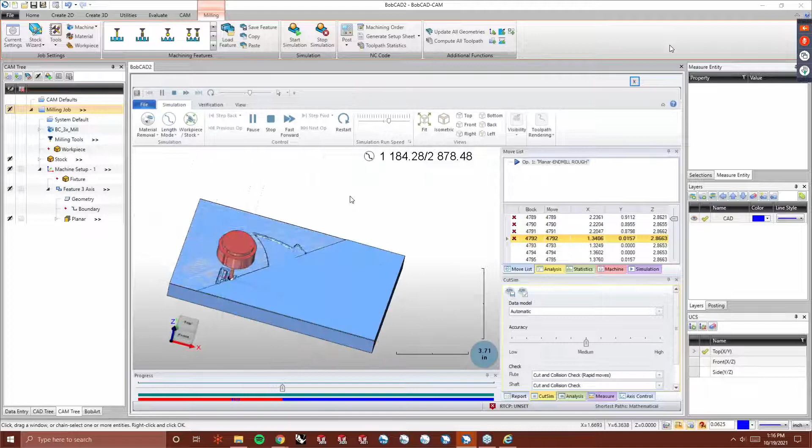Now I just have this kind of cranked up, so we'll see it pretty quick. Now if I have to, I can always have that tool go the opposite direction as well. Looks like it came out all right.

I might want it to go the other way, or even just have it go across X and then across Y. You can have it do more than one planar. There's a lot of different ways you can go in and apply these.

Now, for those of you guys that might have the 3-axis Pro, you can do a little bit more with these toolpaths. Let's insert a 3-axis. We'll just do another one real fast.

And this time, let's do, say, maybe an advanced rough to rough everything out, even though it's only taken a little bit. And then let's do an advanced Z-level finish on top of that. So that'll just really do walls.

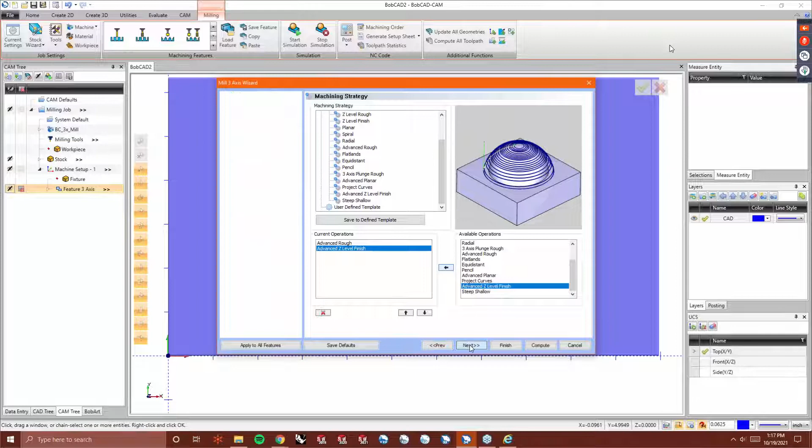So for the roughing, we'll just use the same tool. Depth of cut, let's just do the full 1/8. And we'll actually modify that by telling it to do machine flatlands. It'll machine everything flat with this tool, which we can even change the tooling to a flat end mill.

Step over, yeah, 100 thousandths should be fine. And maybe reduce it a little bit. Let's say 75 thousandths.

And I'm going to leave an allowance, but only on the side. I'm not going to leave any allowance on the bottom. And what that's going to do is allow me to go into finish with the machine flatlands. I can finish that floor, and then the Z-level should do the walls.

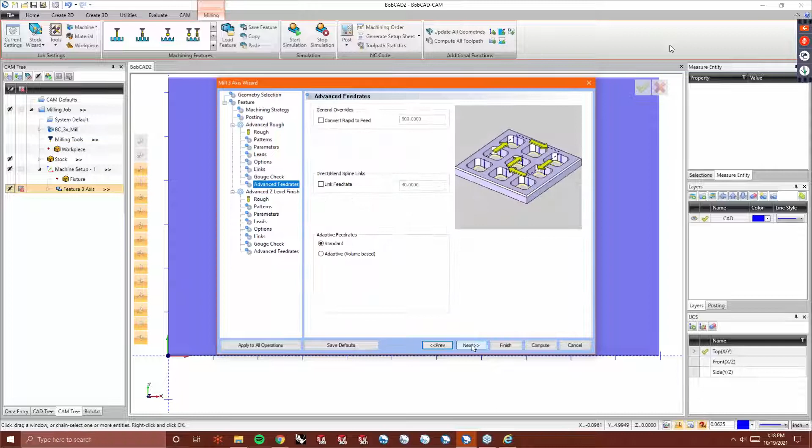And I'm using that 3/16 ball. That should all be fine. Depth of cut, let's make it 25 again.

We want to do a machine flatlands to add an additional pass for the floor. Don't really need anything else there. Not too worried about lead in. Not really worried about the options or the linking. So we'll just go ahead and compute.

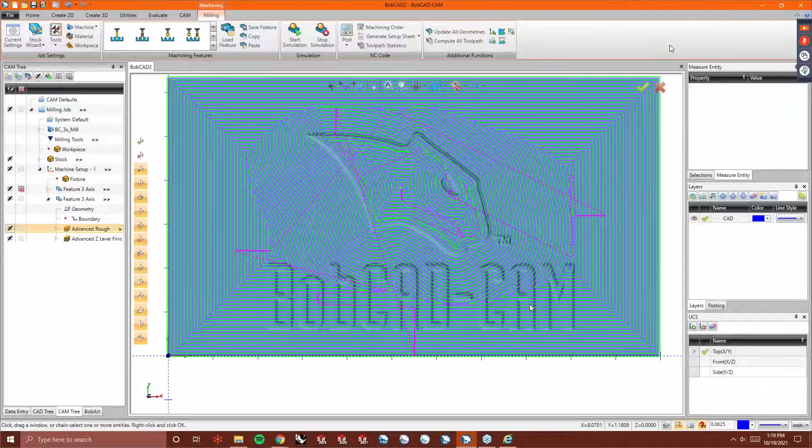So this is doing it a little bit differently, and it actually did a pretty decent job. So it's roughing out everything, and then it's going down and just doing the walls.

So let's simulate that. If you have 3-axis Express or even 3-axis standard, you can do similar things. You just don't have as much control.

Now I really don't even need to do all the flats. I can tell it to only do the CAD. But that just allows it so that tool can just follow those walls, which that did just about as good.

I might need to leave more of an allowance so that I'm not... yeah, that's probably what killed me. The 15 thousandths allowance didn't really leave much for the radius, so some of this is pretty ugly. I may even want to use a smaller radius tool.

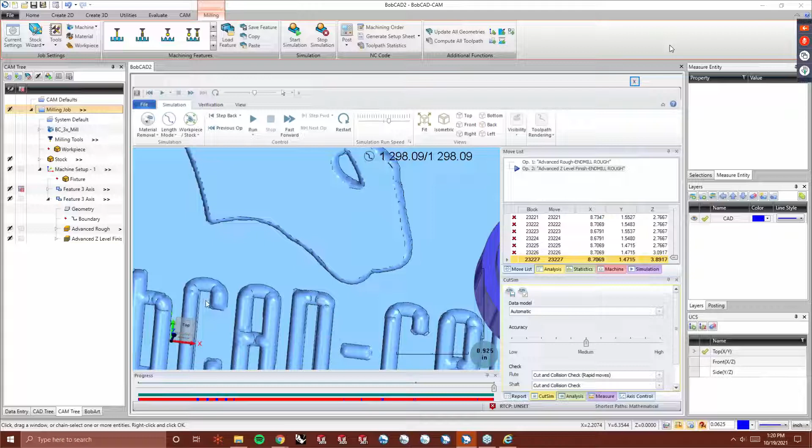But really, it's all 3-axis toolpaths that you can use. You can't use anything 2-axis. And really, if you want to contain the toolpath within, say, just the cat, maybe I only want the roughing in there. Well, you can hit the E key on the keyboard to hide the emboss.

And I can still use that same image. I can load that image in. Because I didn't change the size of it, I can actually use the vectorization to create a boundary. So I just find a decent spot.

And then for my roughing, if I hit the I key to hide the image, I can pick just the cat or the boundary for the rough. And when I compute it, it's only going to be inside of there. So you do have some flexibility of how it goes through to finish on this.

Let's just reduce that tool down a little bit, change the radius of the tool.

Yeah, it looks like it's trying to do a little bit on the outside, so I might want a boundary for that as well, which I could use the same vectorized image for the boundary.

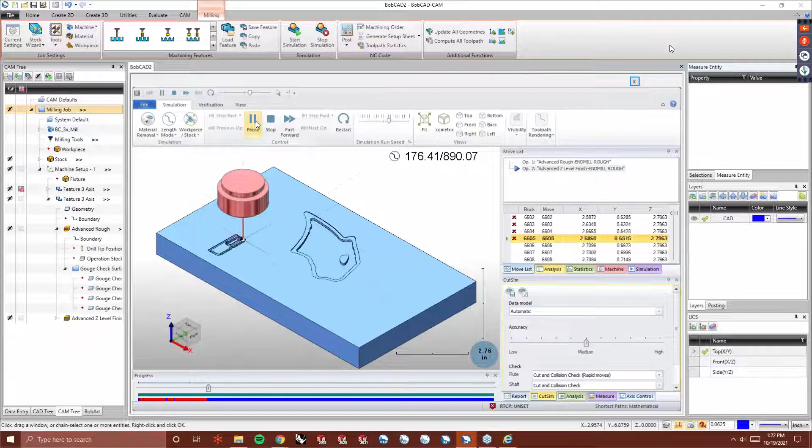Now, there was a lot of extra material because of the tool size change. So I'd probably want to do maybe an equidistant or something so that I can get the bottom, the wall, the floors and everything done in there, and then use a boundary to contain it inside of those. But you kind of get the idea.

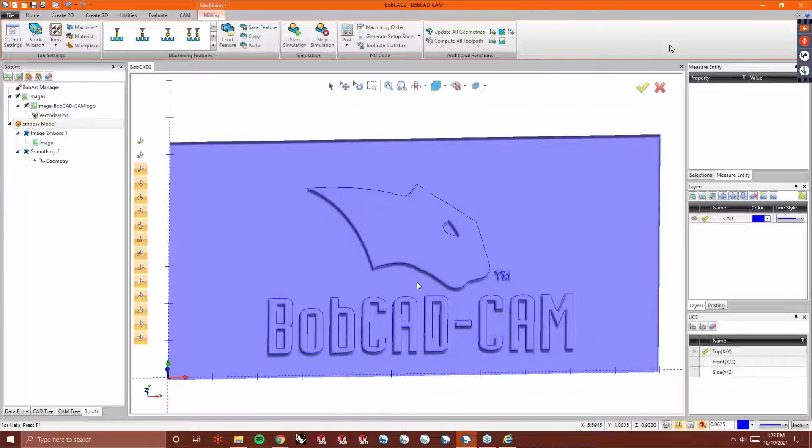Now, there also is, before I move on, when you're doing the emboss, I did an add. If I need to invert this, I can tell it subtract. And it will just be the opposite, where the lettering will be standing up and the white will be in the background.

So when you're looking at an emboss, it's taking the contrast between the colors to generate it. So what you're really wanting to do when you're looking at an image is to find a high contrast image. So let's take a look at some image types real quick.

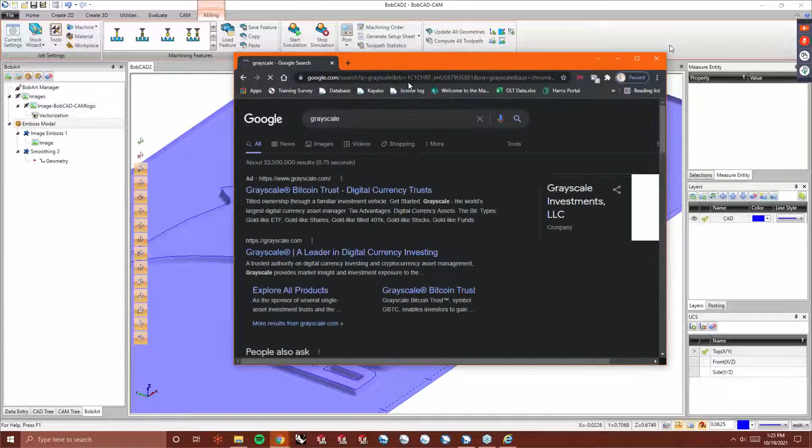So what I mean by that is you need to have a height map. When you add a height map to it, you're actually getting images that are specifically made to give depth.

I'm getting some other ones set up here. So there's three main image types that create depth: grayscale height maps - let's see if we can find something in here that might come out well. That's actually pretty decent.

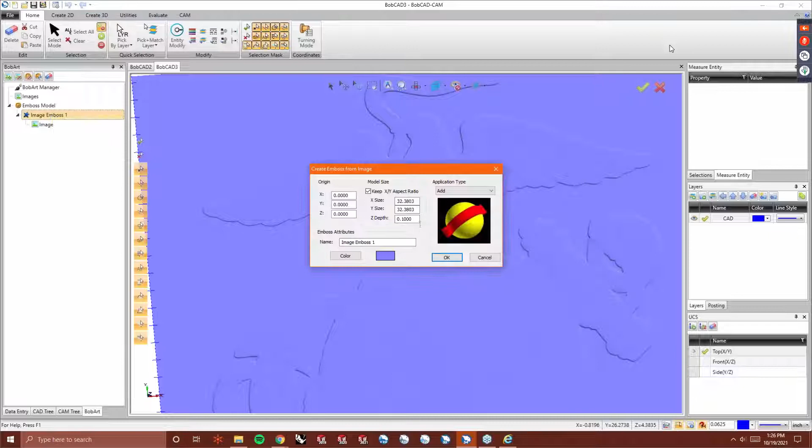Like if I jump to a quarter inch, I'm getting more depth. I'm getting more detail in the wings, more detail on the globe. Really, I found most of these are somewhere around 1 inch, at least.

So then that gives it a lot more depth to that logo. It's actually got texture to it. And if I don't want that texture, I just add a smoothing.

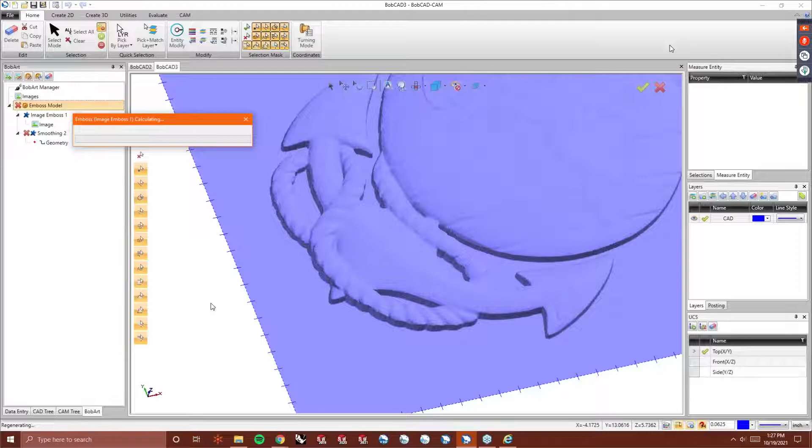I don't even need to select anything, I just regenerate. It'll help smooth that out, which it didn't do much of a change, but there was a minor change.

The other thing you can do that can help out with the final emboss is if you right-click the emboss model and go to Create Modify Stock, you can change the resolution. So right now it's at 71.

It lowers the resolution based on the size of the image so that it's easy to handle, so it can process things quickly. You can dial everything in, and then at the end increase the resolution. When you increase the resolution, you will need to regenerate. It will take a little bit longer.

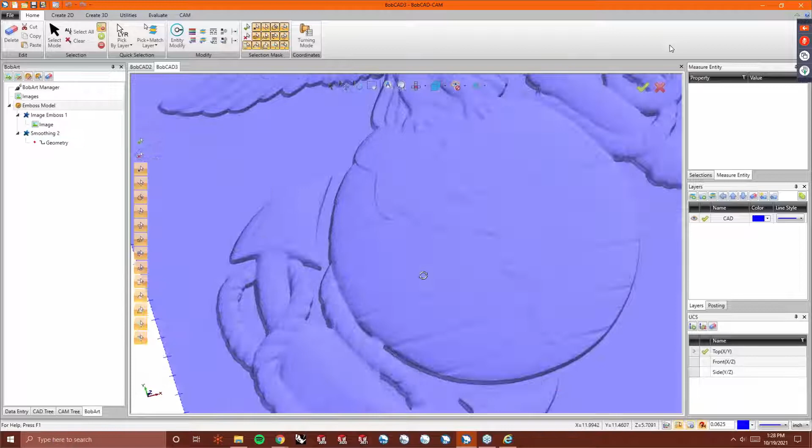If I didn't just overtax everything with the GoToWebinar and everything loaded - but now it's just got a higher resolution to this image. Didn't really get much more detail, and I could probably reduce the height a little bit, but you kind of see what's going on there.

So the grayscale height maps, they're a great way to create that depth. And if you use software like Blender - Blender is a free graphics program where you can create images and things like that. They have a bunch of free tutorials online.

It's a free program unless you make money with it, and then I think you have to buy a license of some sort. But I know a lot of people are using Blender because it is free to create these things.

Now the next image type I wanted to show you is normal maps. Normal maps are made for textures - that's what they're kind of made to do. And they even have seamless textures.

Some of these you have to license. But if you use things like Blender or Maya, you can create your own textures using the same thing. Now, normal maps are what's used in 3D design and game design to create textures.

It's an image that just generates - based on the contrast, it'll generate the texture, the depth. So if I find something in here, let's do this - and that one doesn't look too bad. Let's try this. Save image. I'll save it to my textures folder, and it's called Step 10.

I should have looked at the type of file too, but that's all right. Change it to all files. There it is. Now this one's pretty small, but I could use this one as a texture, so I'm just going to emboss it as is.

Go into kind of an isometric view. Now it kind of brought it up in a weird way, so let's try changing the height.

Let's change that to 1/2 inch. This one doesn't quite act the same as the grayscale height map. So normal maps are good for like a low profile texture. You really want a good high resolution image to get it to work, and then finding that sweet spot for the depth.

These can be kind of finicky. I use them mostly for textures, like in the background of something.

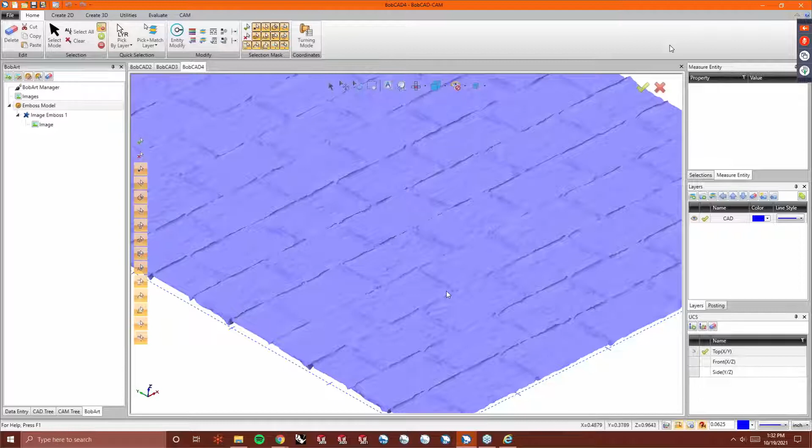Now, the next and last image type that is very handy when you're dealing with BobART, and can also be created through Maya or Blender or any of that good stuff, is Ambient Occlusion. So Ambient Occlusion is essentially a shadow. It's the absence of light. It's there to create depth within a scene.

So what's nice about this is because it has the high contrast and it's using that kind of grayscale to generate it, let's even save this one, if it'll let me. That one let me, so let's try that.

Some of the best images I've used for BobART were Ambient Occlusion. They come in really clean. Same with the grayscale height map. Normal maps are, every now and then you'll get a really good one for a texture, but it's not often.

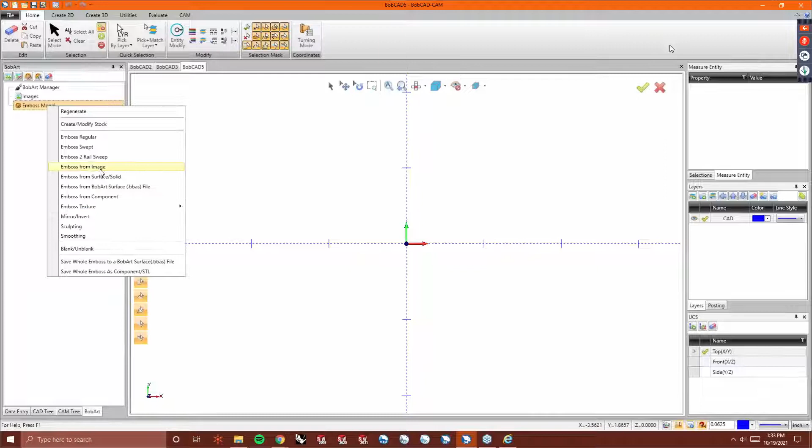Emboss from image. And this one's pretty small as well. We'll just see what it looks like. But that gave me a really crisp

emboss. Let's see if I can increase the height a little bit. Gives me a lot of depth.

And if I kind of rotate to the side, things are proportionate. They look right, you know, kind of. Her nose is a little sunk in, but that's, again, just finding that right depth for it. The ambient occlusion usually comes in extremely well.

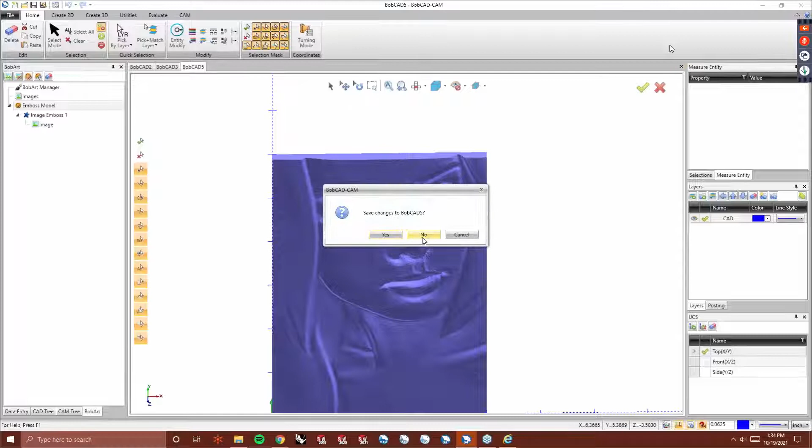One of my favorites that I found over the years was, there's a fruit bowl that I found. Where is it? There it is. You can tell I have a few of them in here. But this one with really no settings comes in super clean, lots of depth, lots of detail.

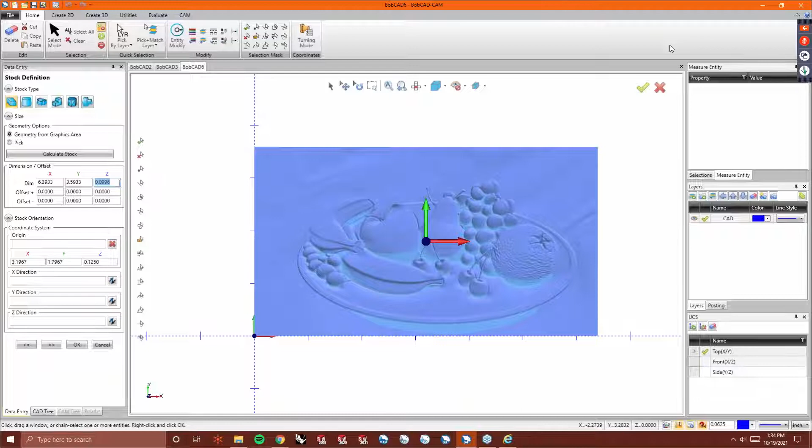Mill's great. You know, there's really not much better images you can get out there. So if you can use these, if you can create images using Blender and Maya and those 3D programs, you can absolutely go in and create your own images for this. You know, I've had people that have taken photos and then created depth maps from it.

We had one guy that was doing mountain ranges. People would climb a mountain and he would get a grayscale height map and actually mill out little mountains for like little trophies.

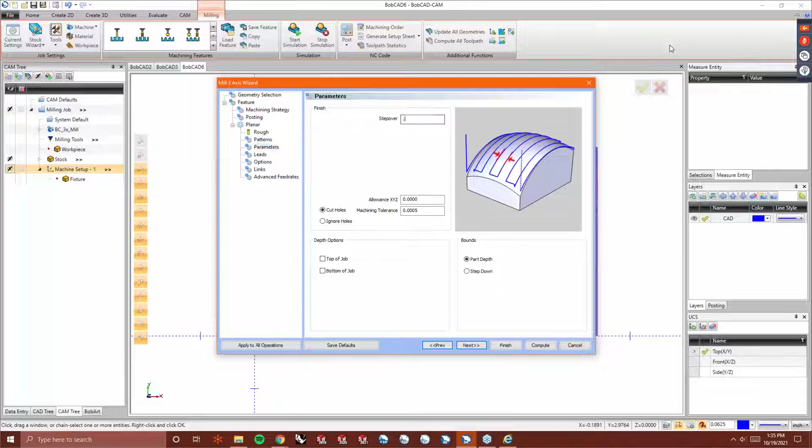Then I'll just do the straight old planar. Let's give it a 1/4 inch ball. And I'm not too worried about the rest of this. Maybe add a lead in here. So there's my planar. Let's see what this one looks like.

And then you can see that came out pretty well. I might have to do a little tighter step over, but it doesn't get much better than that.

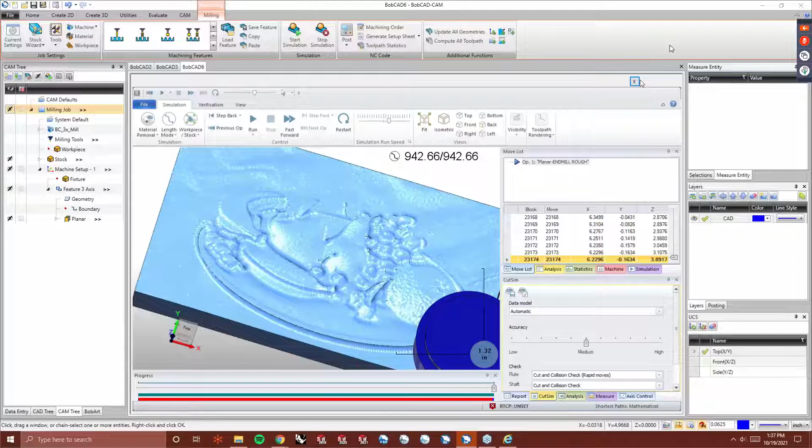All right, so again, you have grayscale height maps. Insanely handy. Like I said, these are really, really good at like mountain ranges, things that typically have a depth within the intent is to show the depth.

Then you have your normal maps, which again, mostly textures. And as you saw, a bunch of them didn't let me download them, so it's kind of few and far between. You have to find the ones you like.

Then we'll take a look at actually utilizing one of these. Maybe we'll throw it into something. But typically, that's the image type that I've used the most. I use it quite a bit.

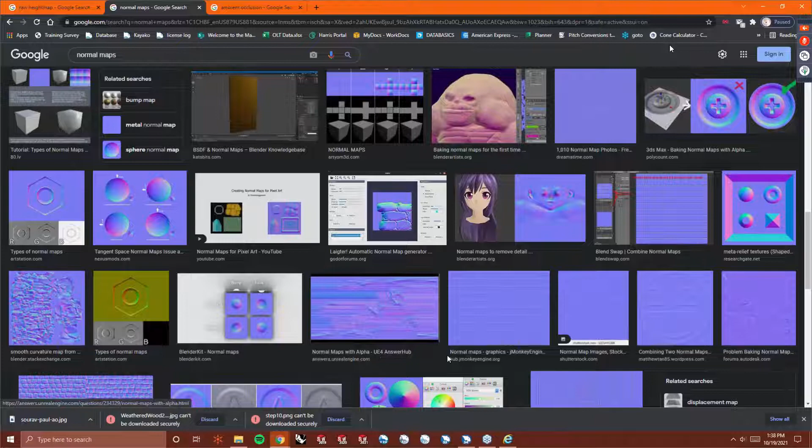But like I said, it's all pretty much textures. I'm trying to see if there's a decent one in here, but I don't see anything that really stands out. And then last, those ambient occlusion maps, of course, are always good. And because of the way that it's generating the shadows that would be cast, that's what's generating the image.

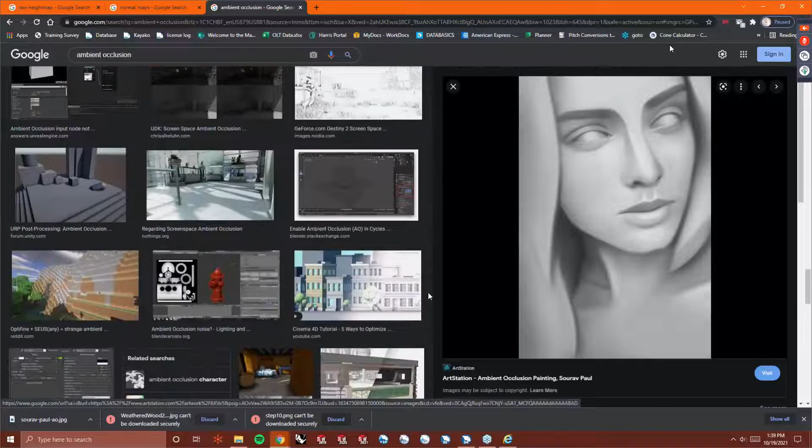And there's a lot here, but most of these you're going to have to create yourself. Blender is a free software you can download to create these. There is quite a bit of a learning curve. I personally have not used it myself, but I plan on doing so whenever my desktop at home is done being built.

All right, so we're going to use some of these different functions together, and we're going to do a multicolored image for the vectorization. Like I said, there is a little bit of prep when you're doing multicolored images. So let's go ahead and close some of these.

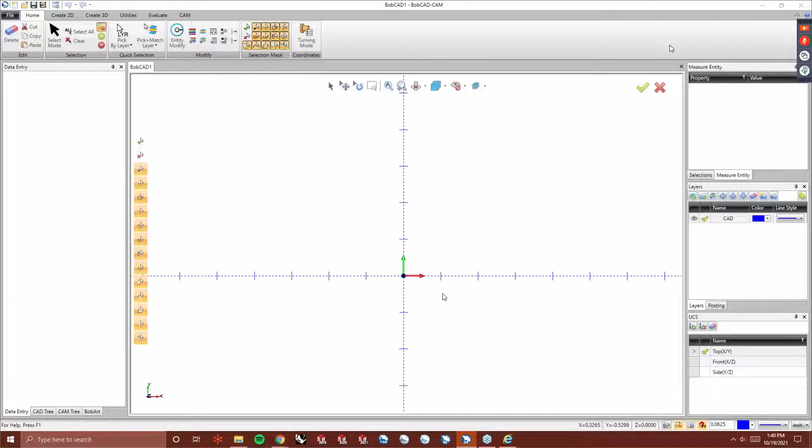All right, so let's do a multicolored image, and we'll look at some embossing with it. I'm going to go to BobART, go to my load image under images, and I'm right-clicking on that to get to the menu.

And then I'm going to go to, if I can remember what it's called, the koala on the tree. I did rename it. I like to use this image because it is a good high contrast with bold colors. It's very easy to see each color in this, and they're easily discernible from the software, so it's easier to pinpoint each section.

However, when you go to vectorize, I don't want to do the black and white strategy because that's going to get the entire thing, and we don't want that. We just want certain parts. If you notice, when I go to multicolor, it's already set to 7 colors because it sees 7 defined colors within this drawing. So if all I wanted was the black, I'll hit OK.

And then if I hit the I key, that's all I have on that vectorization. Well, if I go back in here and tell it I also want to get the green, I want to do a separate vectorize, it deletes out the old one and brings in the new one.

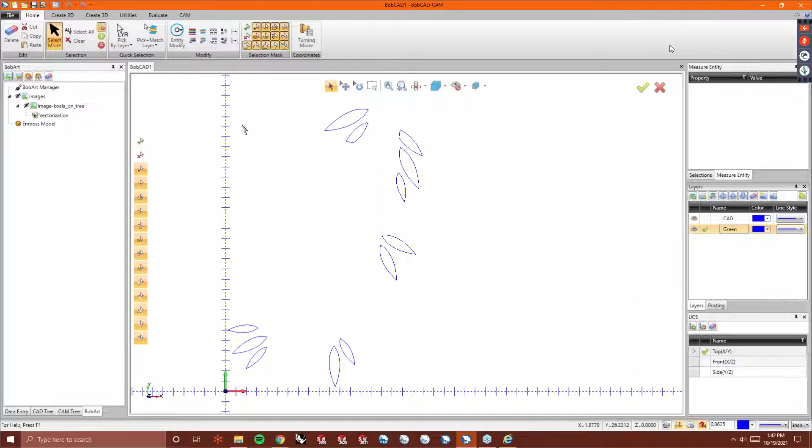So what you need to do is create a layer. Let's call it green. You'll want to then copy the geometry that you vectorized, so you have to go to select mode, select everything. You'll go to create, go to home, and go to copy, and then paste. Because the green layer has the check mark on it, that's the layer it's putting it on.

I hid the CAD layer, so I'm just looking at that one. If I move my check mark and hide the green layer, I can go back into vectorization, cancel select mode, and this time tell it I want the black. Since it got rid of it last time, I'll bring it back.

Now if I show the green layer, I still have that there. So again, you want to add a new layer, I'll call it black. I'll go to my select mode, select the geometry I want, and you can even hit Control-C and then Control-V on the keyboard, and that will copy and paste. Control-C is in cat, and V is in Victor.

So I'll go back to vectorization. Maybe this time we'll get the brown. Actually, let's think about the order I want to do this in. Let's grab the pink. Now I'm not going to do the entire thing, that would probably take the rest of the event. I did want to show you some applications of the vectorization and emboss functions.

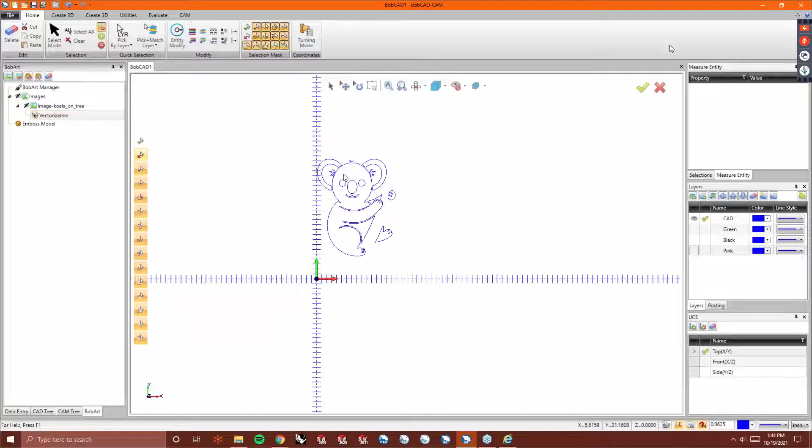So we'll be jumping back to more of the embossing here in a second. Now I don't know which gray I want. There's a light gray and a dark gray. The light gray is going to give me one result, and the dark gray is going to give me the other.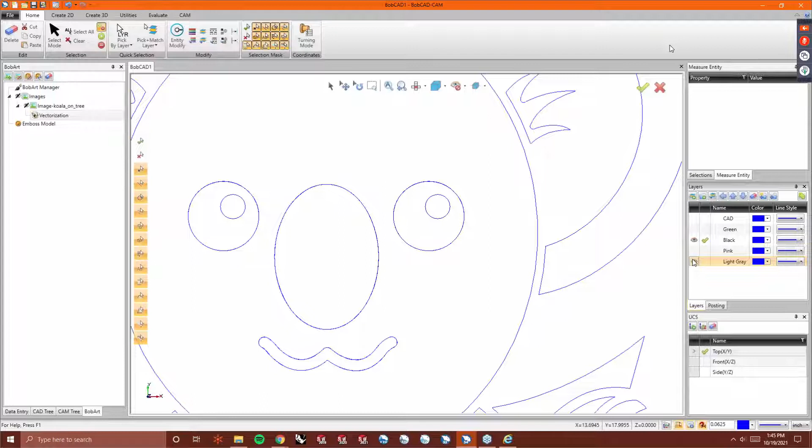So let's go ahead and make our layer for the light gray. Now some of these are going to have very similar geometries, but I'll show you they're actually not the same. For instance, the black also has some of the light gray in it, but they are slightly different, actually off from each other. Typically it's just easier to single things out, so you'll have the entire color on one layer.

So we'll do dark gray next. Now you can't add the layer and have it vectorize to that layer automatically.

So what I mean by that is I have the check mark on the dark gray layer right now. If I go to vectorization and change that, it's going to vectorize that, but it only vectorized it. Oh, it's making me a liar.

Did they update this? I have not tried it in 34, so let's add a new layer. Let's call it white. If they did, this will make this so much easier.

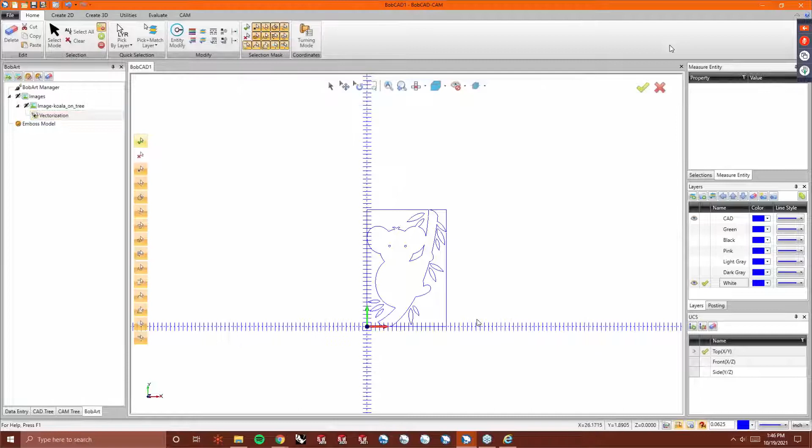So you guys that are on 33 and under, you're going to have to copy and paste. I know that for a fact. I've done that a couple months ago, and you'll actually, if you go back to some of the recordings of these, you'll see that I had to do that. Yeah, okay, they updated it with 34, so now it's actually vectorizing to the proper location, proper layer. Just good to know.

What other colors do we have in here? Let's move this back up. So we've gotten the dark gray. Oh, we need the brown still. Light gray. We've gotten everything except for the brown, which is fine because now I have it on this one. So now we have all of them laid out in different layers.

So what does that do for us? Well, what that's going to do is help us with vectorizing, or with embossing. So let's go ahead and let's see here. What do we want to bring in?

Now there's nothing on the dark gray. So maybe I did, or the white. Okay, so you do have to copy and paste it. It didn't do it like I thought. So that's good to know.

So we'll redo the dark gray. I was going to say, I didn't think that got updated. There we go. Now it's in there. And I really don't need the white, but I'm going to do it anyways. Just checking each one of these, making sure they're all set. Should be good to go there.

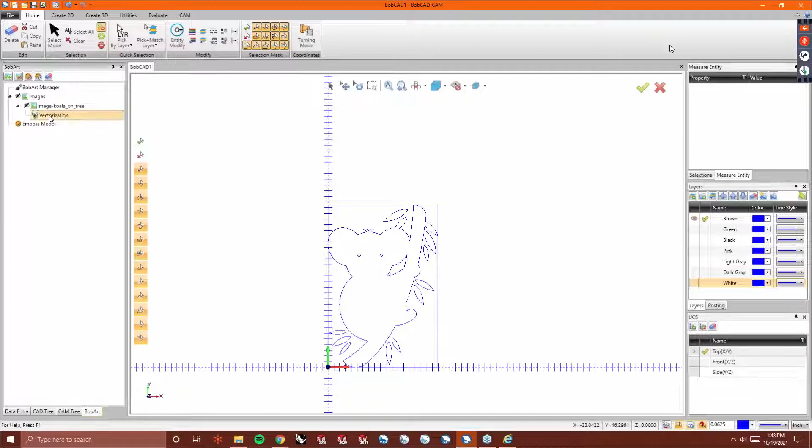And we'll get our brown back in here. No, and really, I've always wanted to change this a little bit, change this drawing a little, but I know it's going to take too long.

Because what I would probably want to do is essentially get rid of the internal shape of the koala on the dark gray layer. And the reason I say that is this is just going to create a boundary. But if I got rid of everything internally, we could make this more or less a platform to emboss from and then add to. We just raise up everything. But I'm not going to go through all that trouble right now.

We'll kind of speed through doing a couple of embosses here. And really everything is embossed regular. Now the model size, the stock parameters, I don't know.

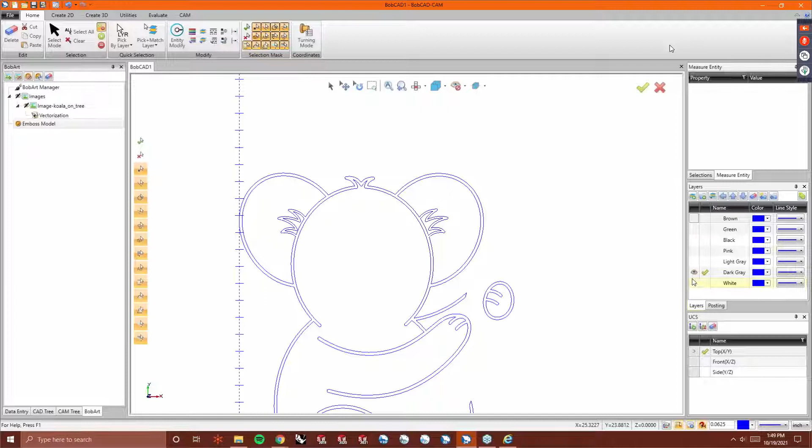So what I want to do is just hover my mouse. Let's go ahead and turn the white layer on since it's the outside. And I can actually go in and evaluate. Let's just do a measure 1. That is my dimensions right there. So I can set up my stock based off of this.

So we'll go to BobART, Emboss Model, and we'll go to Create Modify Stock first. So my X is going to be 18.9217, and my Y is going to be 28.5083, and that sets up my stock size.

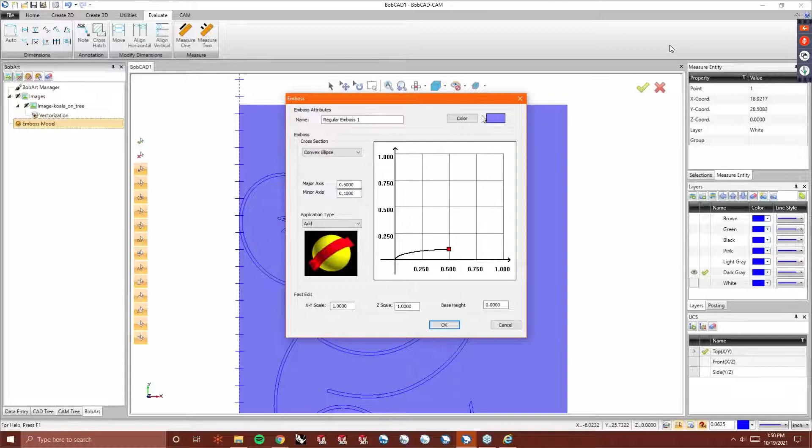Now I can right-click Emboss Model and go to Emboss Regular. So let's do this as a convex ellipse. We'll do something kind of small, and we may change the size of these, but I'm going to leave the default sizes and everything first. And I'll change the color so we know which one it is. We'll just pick a grayer color. Let's just do this. We'll do that black.

So it doesn't do anything when you initially start. We need to go in and select our geometry. So right-click Geometry, just like you would in Toolpath, and go to Reselect. And we're going to hold Shift. And I'm just going to pick the outside. I'm not even going to worry about the inside of this one. Not even going to worry about the inside of the ears. We're going to leave that alone. We'll see if we want to manipulate that a different way.

So now I can right-click Emboss Model and regenerate. So that's going to give me that little border, that little outline. That looks pretty decent. Let's turn on the light gray. And I can hit the E key at any time to hide the emboss, so if I need to just see what's behind all this, I can.

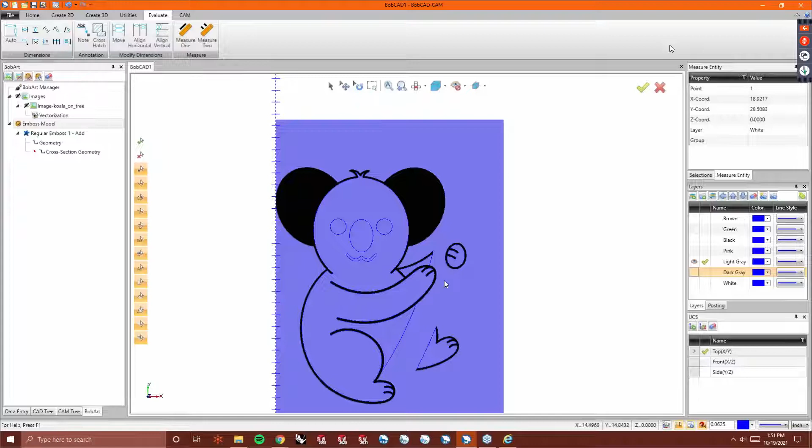So I'm going to do another Emboss Regular. This time let's do it as a convex arc, and I'll change the radius down to 1/8. Again, I'm not changing anything else, and I'm adding.

So now I want to right-click Geometry and hit Reselect. I'm going to pick the main body. Oops, hope I hit the right key. I'll select the pieces on the outside. And I'm going to stay away from the inside of the ear for right now. So that's my selection. I'll right-click Emboss Model and hit Regenerate.

Now let's go ahead and change the color. Let's change this one to like a light gray.

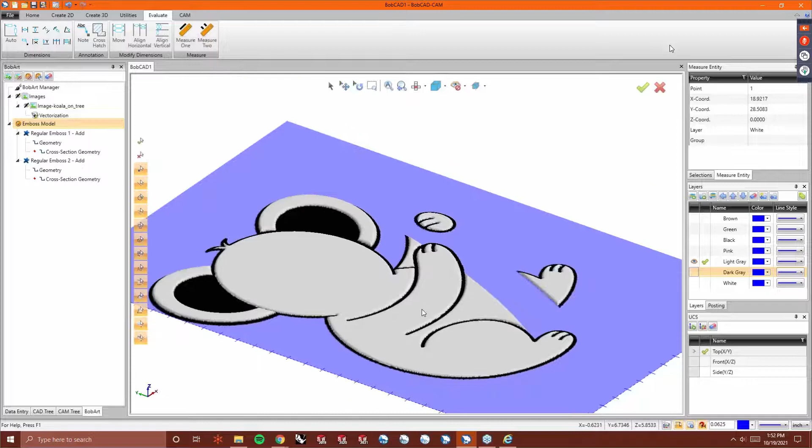So we can kind of see what's going on here. Let's go to an isometric view so we can see some depth. It's starting to look all right. Let's go ahead and add some of the facial features here.

Do I want to do that? Let's do the ears real quick. Depending on how you set things up, you can create depth in different ways. So I want to go in and do a subtract here to create the little ear section.

So let's turn on pink, I'll hide the light gray. We'll hit E just to show it what we got here. We'll do another emboss regular, but this time as a convex ellipse, and I'll do it as a subtract, so it'll be a nice subtle subtract. And we'll change the color to a pink.

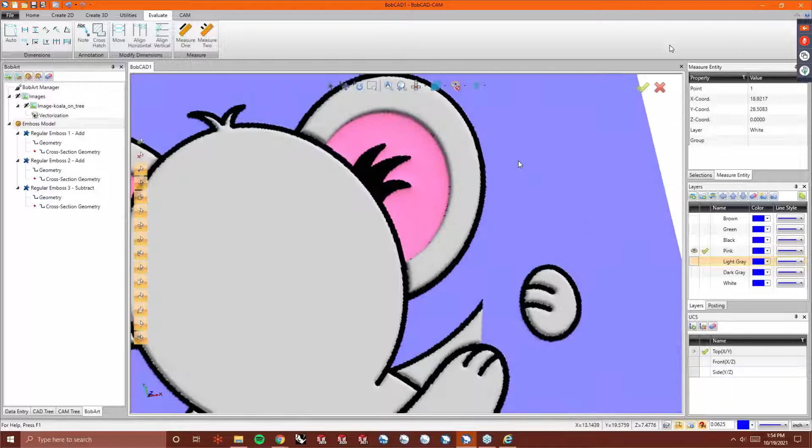So again, I right-click geometry, hit reselect, hold shift and pick my geometry, right-click and OK, and then regenerate, and hit the E key on the keyboard to bring back the emboss. So that's created that little 3D kind of relief dipping down in there.

Now I can add the kind of white fur to that section. So if I turn on white, that should have... that doesn't. One of these, there it is, has some of the tufts of hair there. That's the one I want.

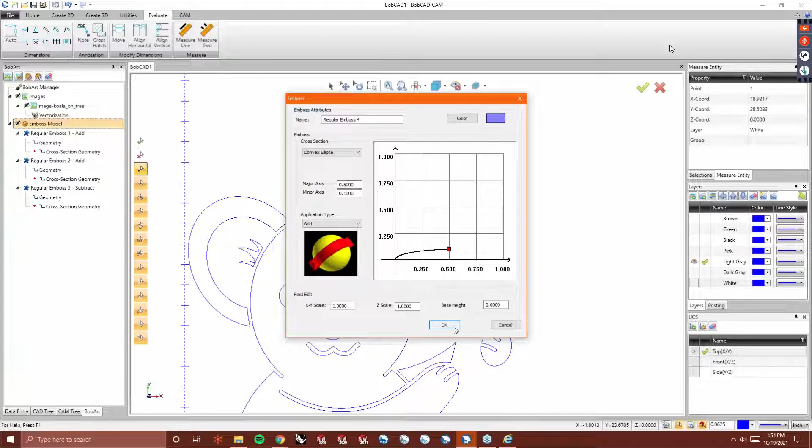So I'll do an emboss regular, let's make this convex ellipse. I use a lot of ellipses for just a nice subtle radius. We'll hold shift and pick our profiles, and then regenerate.

So now that's added it just to that little section. Now I know it's pretty hard to see the depth and everything that this has, but there is a little bit of depth to it all.

Let's go ahead and change the color of these, go to white. And just like toolpaths, when you click on one of these features, it's going to highlight what that is selected, what it is, and just kind of point that out a little bit.

Most any embossing you're going to do is really just going to be an emboss regular. There's not a lot of variation to it. I'd say 99% of everything I've done, besides emboss from image, when I'm doing actual embossing, it's practically all emboss regular. I don't use any of the other features too often.

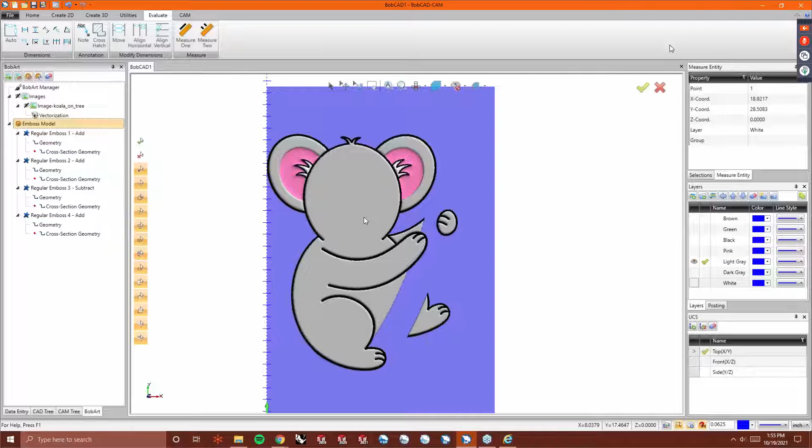Now, I did say I wanted to, we'll spend a little bit more time on this one, we'll maybe add some more of the face.

So I'll do another emboss regular, convex arc. We'll pick the... now I may want these even on different stages. I might want to do the eyes recessed with this little part sticking up, the iris and the eye sticking up. So I'm going to do an add on the nose and mouth, it just adds those in there a little bit. And then I can tell it to do a subtract for the rest.

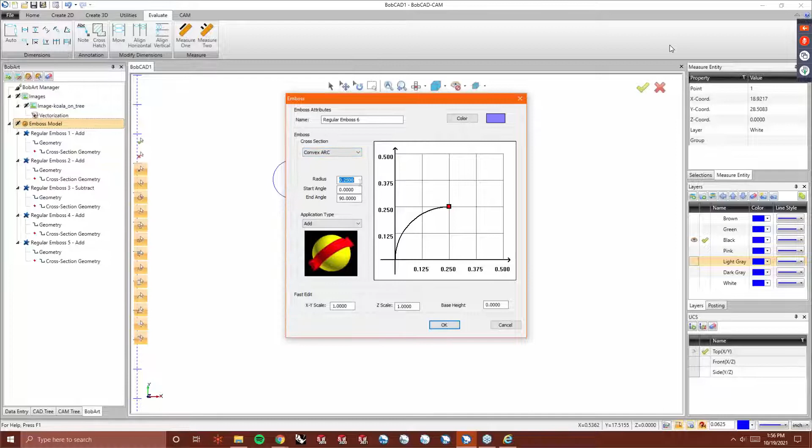We'll do a convex arc, but I'll make it a 16th radius, and I need to make it a subtract. Now we'll change the color. The colors really don't mean anything, it's just there for a visual. So that's going to recess in there. Then from that, I can add in the iris.

You can kind of piecemeal this and step it in. Now this one I'll do as a line, so I might have a 1/16 of an inch line, and then height, and even the angle I can change. I might make that 75, so it has a little bit of a taper to it, but it's not vertical.

And we will add, so if I reselect, again, I'll hit E to hide my image - hide the emboss, I should say. And then that adds that to the inside. And you would mill it the same way, you'd still use the 3-axis mill, still using planar.

But it should be stacking these on top of each other. So it's pretty much always relative to the previous emboss that you had, if they're on top of each other. Like these are all on top of each other, so they're from those shapes.

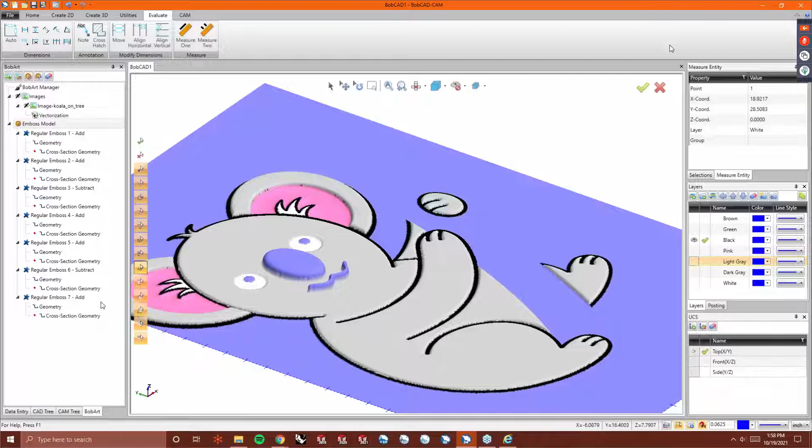So if I go down, say negative 125, you can see it's actually even made like a little crease around the edge. Like I said, this is mostly everything you're going to do with embossing, there's really not a lot to it.

Now, I do want to grab my DXF ClipArt book. We're going to go through kind of using some of these other ones, not all of them, but a couple of them. So bear with me one moment, I will be right back. I got to go grab my book, and then we'll continue.

All right, I am back. So let me find something in here. We'll find something not too simple, but simple enough. I don't want to go too crazy.

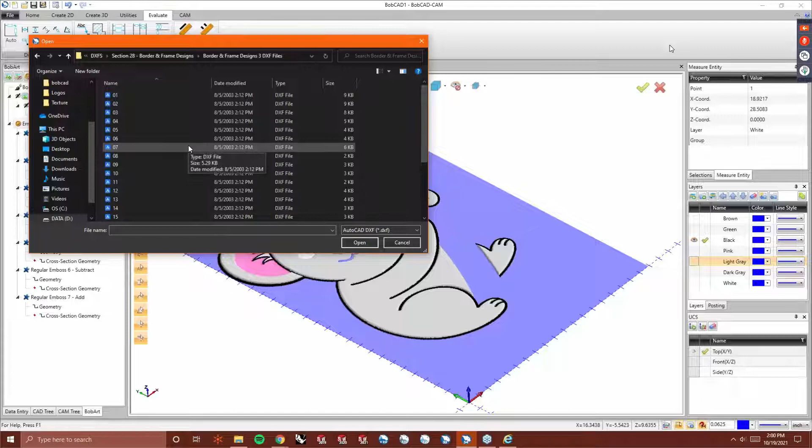All right, so this is section 28, number 3, got it on my DXFs, and I'm looking for number 21. All right, so I've just got a basic frame. This is just right out of our DXF ClipArt book.

I haven't done anything to it, just pulling it out as is. Now I'm also going to vectorize. We're going to use pretty much every part of BobART with this. So normally what I do is I'll just create multiple layers. Because I know the BobART vectorization is going to go to this first layer, I'm going to add a new one, and we'll call this frame.

So this frame is going to go on that layer. Now, if you have 34, there is a nice little handy button, move to current layer. That's the checked layer. So if I click that button, it is now only on that layer. Just one of those new things that they added this time around.

Now I also want to bring in that Bobcat image. Let's just use that again. I do need to get a cleaner one for some of this, but that's all right. We'll vectorize it.

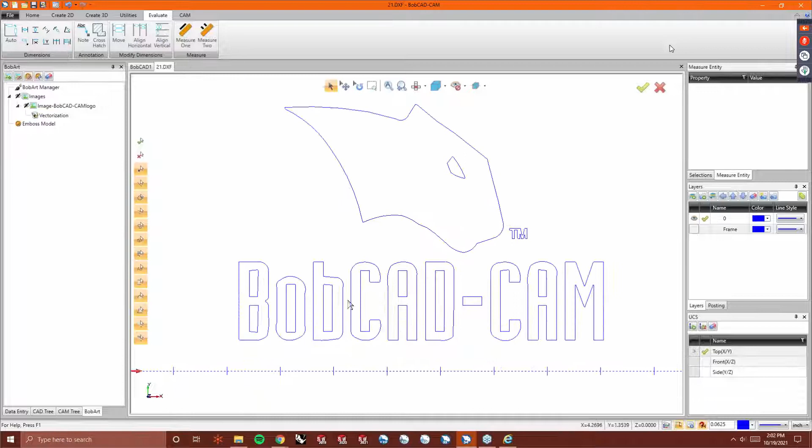That should be pretty good. Let's just increase the accuracy of fuzz. It's not too bad. I'm not going to worry about cleaning it up. I know we did that a little bit this morning, but all right.

So now I have them in two different layers, so I can blow one up, I can shrink it down. What I'm going to do is I'm going to shrink down the Bobcat and put it inside of the frame.

So we're going to go to Utilities, Translate, and I'm going to pick everything. And actually, let's do one thing real quick, because this is never going to come out very well. Just select that and delete it.

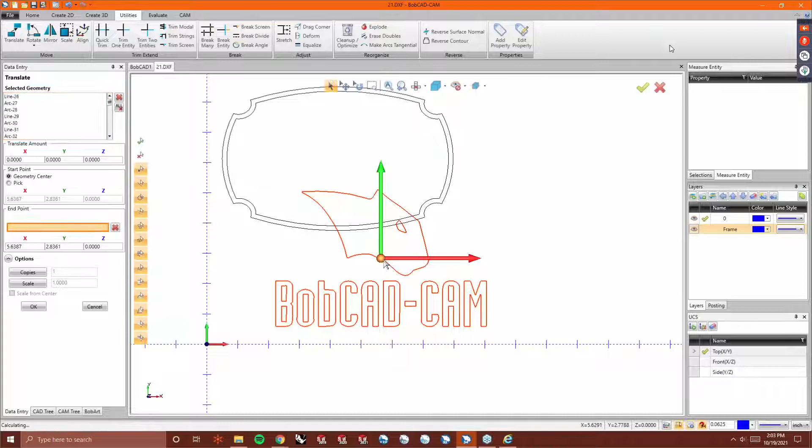We'll go to Translate. Now I want to select everything, and then I'm going to turn the frame layer back on. So I normally just grab it, kind of move it centered-esque in wherever I'm putting it, and then go in here and scale. Now there is a slider for scaling. I don't happen to like using that too often. There's a snap increment applied to that. You can turn the snap increment off, and it should allow you to just scale to whatever.

Now I turned on the scale from center, so I can kind of eyeball the center of the part, and that geometry is not going to move anywhere else. It's going to just sit right in the middle there. I could also give myself some construction lines to actually find center so that I'm actually translating off the center.

But you know what? Let's go ahead and do that. I think I like this size. Maybe just a fuzz smaller. Yeah, that'll work. So before I finally finalize it, I'm going to put it off to the side, right-click, and hit OK.

I'm going to give myself some construction lines here. So I'm going to go to Create 2D and Line. Really, I only need one. That'll have to help me find center.

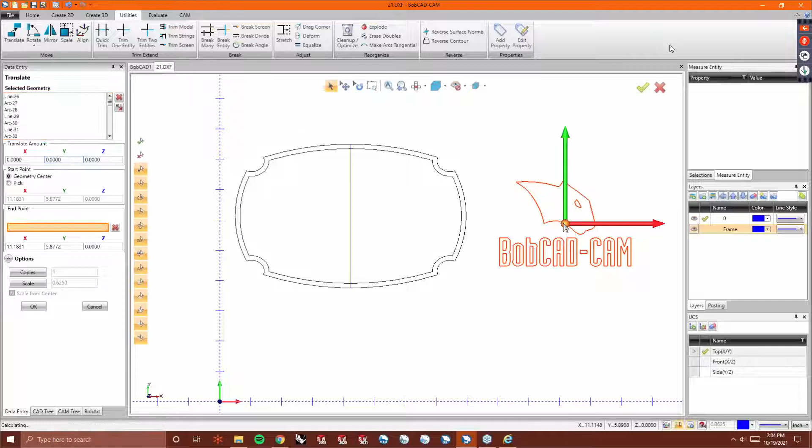So if I go to Utilities and Translate now, window pick what I want. We'll turn off the scale. And then if the translate is way out in space and you want to just get it back to where the geometry is, just zero the first amount here. As long as you're on geometry center, it'll just put it right back, and then you can go in and snap to that line.

So we look good there. Let's go ahead and delete this extra line. All right.

Now, I got this frame only because I was going to use some two-rail sweep, but there's really not a lot that I really need to do for a two-rail sweep on this one. We're going to try to use it anyways.

Now, I do want to move all of this down here. And the reason for that is so that when I go to vectorize, when I go to emboss, the embossed image stock always starts here. That way I don't have to move it. It's harder to move that stock than it is to move your geometry. Way easier to move geometry.

So we'll go to our BobArt tab, right-click Emboss Model, and we need to create stock. So actually, before I do that, let's find a size. This thing is going to be roughly 5 by 8. And if you're not aware, I am just looking at the readout of the XY. As I hover over an area, I can see the readout.

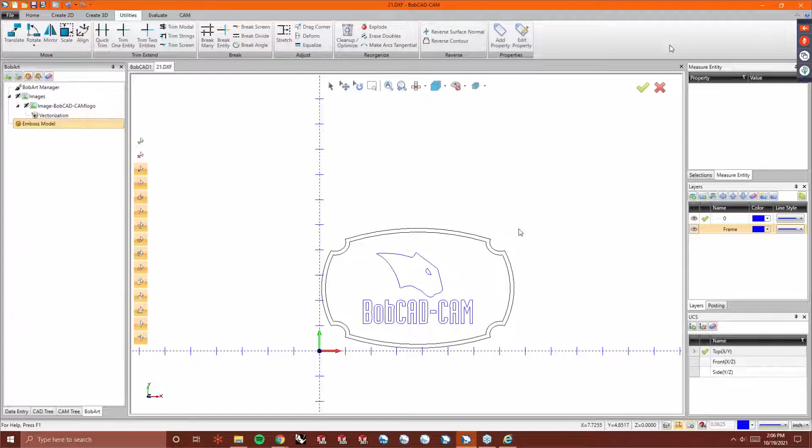That should be good. All right.

Now I might want to do, let's say, two-rail sweep. With two-rail sweep, you're going to have a couple of things. First off, you're going to have two rails, and those two rails are determining what you're putting in between them. So let's go ahead and hit OK. Don't really need to do anything there.

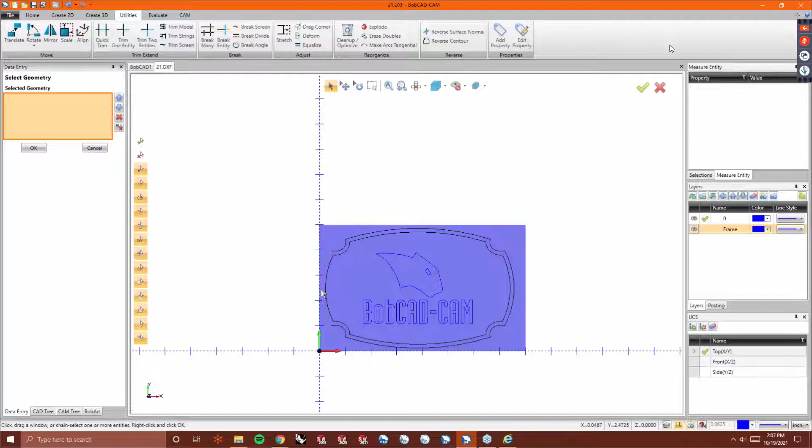There's this cross-section geometry. So rail 1, we're going to right-click and hit reselect, and I'm going to pick the outside. Rail 2, I want to pick these roughly in the same area because they are going to have an arrow. If you notice, there is an arrow setting direction. They're both roughly in the same location. That's very critical. If you don't have that in the right spot, it's not going to give you the two-rail sweep correct.

And then let's go ahead and just generate a spline, do something a little more organic. Now this is obviously wider than this slot here, that channel. But we'll see what it does.

So there is a direction for all of these. Just make note of that in the back of your head, and those directions do have to follow a specific path. Now you'll see it did the 2-rail sweep. It took that geometry and put it between the two that I have, but it's kind of cut short and it's not embossed the same height all the way around.

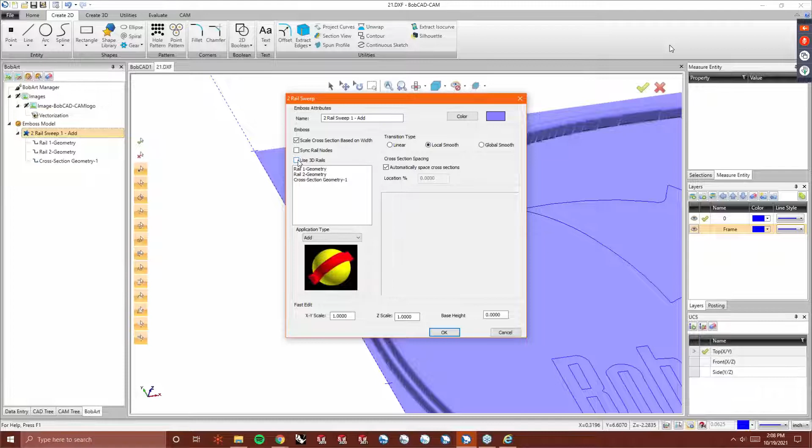So we're going to go in here and edit. There's a few checkboxes. There's the transition type, and that's really what is going to throw everything off. So if I say use 3D rails, I don't think that one's going to change anything. And it didn't. It actually literally changed nothing. I honestly can't remember what each one of those does. I usually just go through until it looks right.

So the sync rail nodes, you'll notice these corners are now proper, and it is technically the right height. So if I edit, you can also just scale cross-section based on width. It's scaling the geometry I gave it based on the actual width of those two geometries. So if I had picked geometries that were further apart from each other, it would have actually blown it up bigger. I actually want to change my Z scale.

Let's say 0.75. So what's going to happen is it's going to bring this down in Z. So you do have a little bit of control even if your cross-section is not perfect in the height.

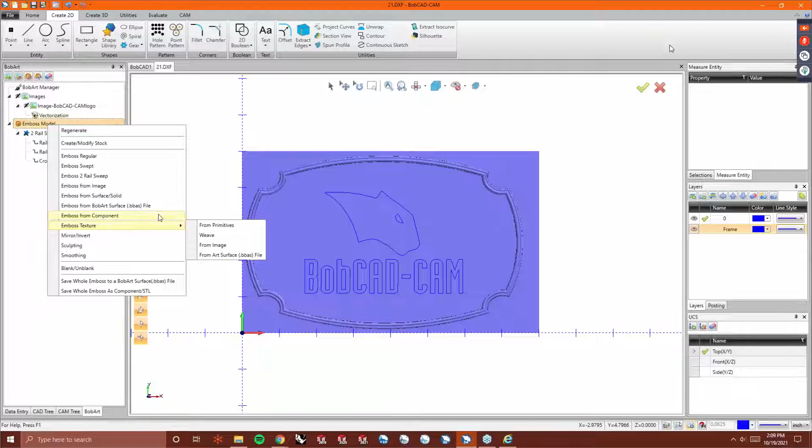All right, so now the middle, maybe I want to add a texture. Let's go ahead and emboss, and we'll do emboss from Emboss Texture, and I'll do from image. So you can't really define anything yet because we don't have the image selected. We don't know what's stamping and all that. So I'm just going to get it and go ahead and hit OK.

We need to first select an image. So let's go ahead and go to my textures here. Medium icons so I can see what they look like. And let's do all files because that's going to give me more. I want to say some of these, like this wood seamless, I think comes out pretty decent.

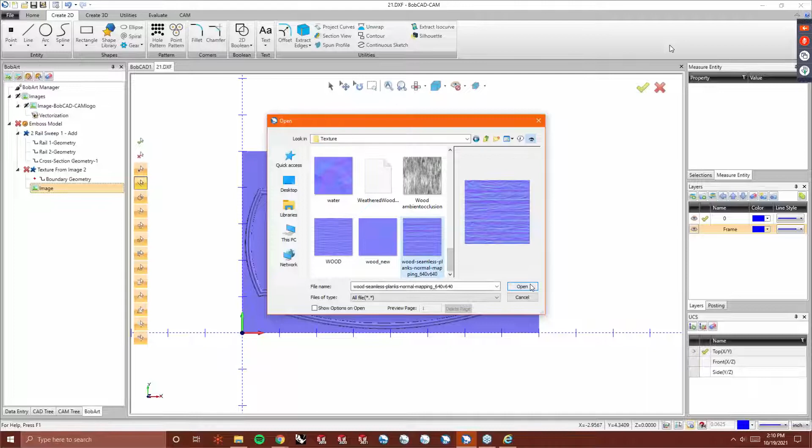Then the boundary geometry. So I want to right-click boundary geometry and hit reselect. We'll hide the emboss, and I'm just going to pick this guy right there. That means everything on the inside is going to get this texture. So now I have that wood grain texture going across this frame. And that actually came in really good. I'm happy with that.

Now, if I go ahead and do an emboss on the BobCAD stuff, maybe I want to add that as a nice emboss on the top. Maybe do a convex ellipse. Hide my emboss, let's go ahead and reselect geometry. Now I'm going to omit that guy. I want to actually bring that up, and then I'll subtract the I out of it. But I am going to pick all the letters.

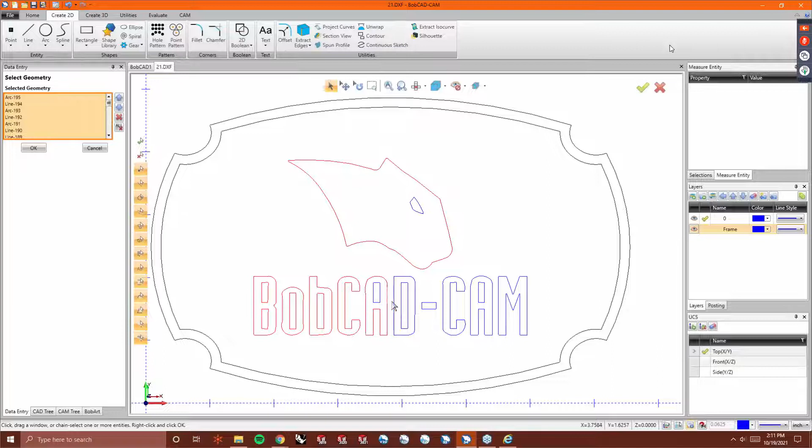And it's going to look pretty bad for the letters because, again, this image is not the greatest. But I use it for just that reason. All right, let's bring our emboss back. Regenerate. So it's applied the texture to the letters, and I don't really want that.

So when you're going through, you have to kind of think about what you're embossing and what that's going to do in the end. In a lot of cases this would be fine, and a lot of people would want this. I know one of the shops I was at, we did stuff like this all the time. However, if you want it to be just solid letters, maybe I actually want to split this up. I'm not going to pick any of this stuff. We're going to do the lettering different than the cat head.

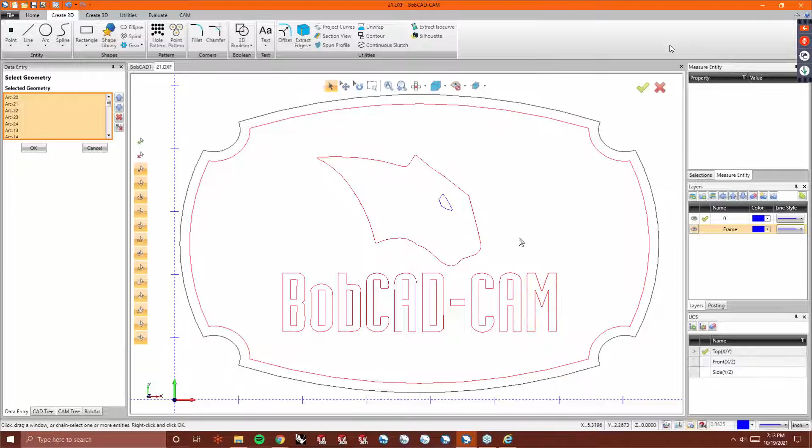So we'll regenerate all that. So now I have a nice clean emboss there. Let's go ahead and modify that slightly. Maybe I want to do a different ellipse. Maybe the major and minor axis I change a little bit, so maybe 250 major.

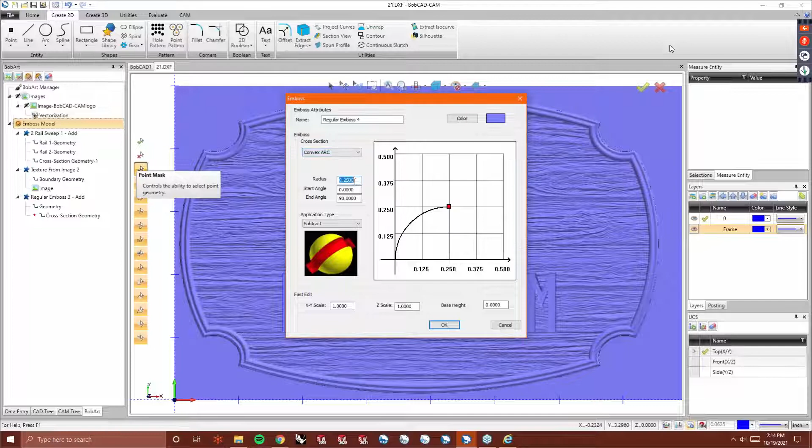Let's see what that looks like. That softens it up a little bit. I think I like that a little bit better. Let's go ahead and subtract the eye. So I'll do an emboss regular. We'll do a subtract, and we'll do this as a convex arc. We'll just make it maybe a 16th.

Looks pretty decent. Now the lettering. Now what's cool is you can even add in like a V-carve toolpath to all this and have it just V-carve those letters. A lot of people do that. A lot of times that's kind of what people are going for. So actually, let's go ahead and do that.

We'll deselect all this stuff again. Regenerate. So it's just the wood texture with the cat head. Now I'm going to go to Emboss Model and create Modify Stock, and we're going to remove the non-embossed area. By doing that, it's going to get rid of everything we don't want in the scene.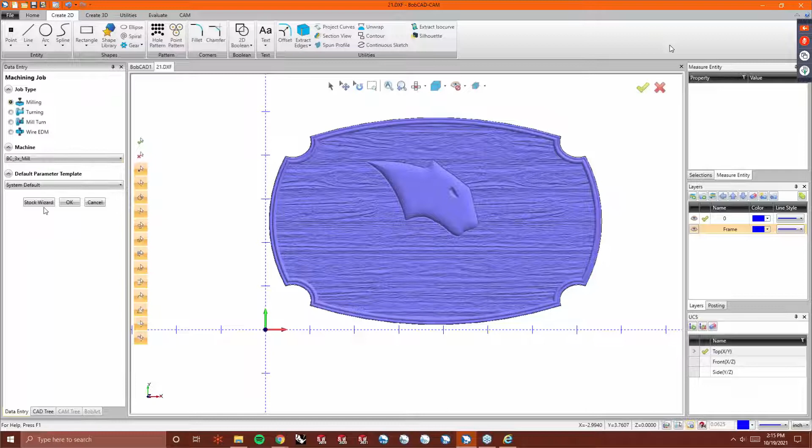All right, so let's go to our CAM tree. Go to New Job. All right, so our stock, let's make this, I don't know, let's make it 1/2 inch. I'll move my Z up just a hair. So we're taking some stuff off the top. And my origin will set on the top of the block.

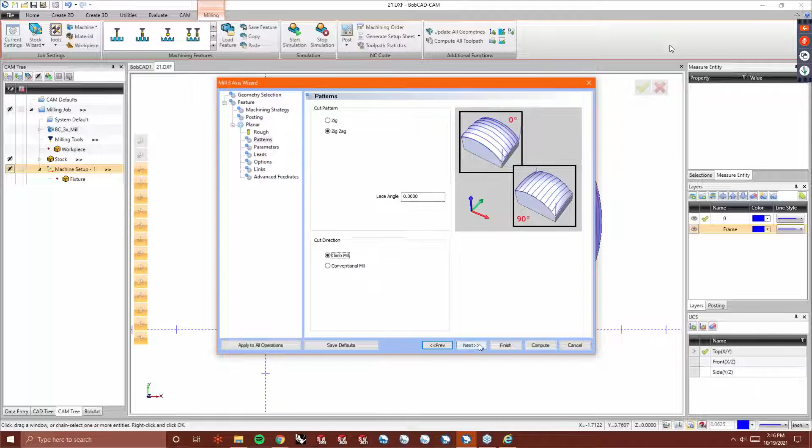So now I may want to do a mill 3-axis over the whole thing. A lot of times what you'll have to do in these cases is just a standard planar. Let's go with a 1/8 inch ball. We'll do 90 degrees, should be fine. Actually, let's do 0 so it goes along the grain of that grain texture. Step over, we'll make that pretty small, like say 20, 30 thou. No allowance. Bottom of job.

I'm probably going to need to use this, and I'll show you guys why here in a second. I know this isn't really the 3-axis day, but there's some important tips. So we're going to hit compute on this. What's going to happen is that toolpath, when it gets to the edge of the part, the tool is going to stop.

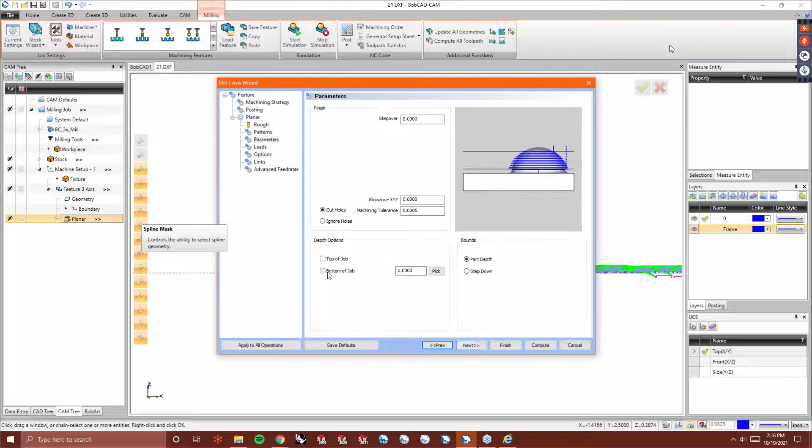Actually, it went all the way down. Perfect, I kind of wanted it to do that. Just making sure that it would. Now, I don't want it to go this far down. So if I go into planar, I can come into bottom of job and say -1/4 inch.

That's the max that it'll go below. Now, it only got rid of a little bit of that, but it just helps me to know that it's not going any deeper. It's not going to cut through the part. And this one might be one that I have to go two different directions.

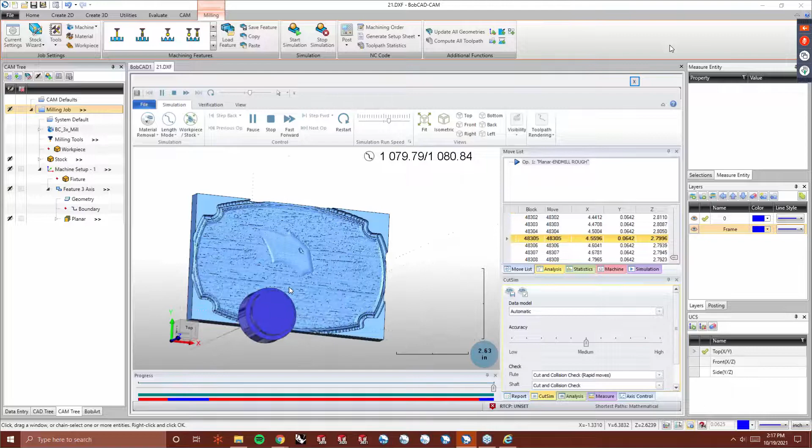Actually, that end mill is kind of the perfect size, so I don't think I will need to. So now I've got to kind of figure out the depth that it just did to get to this wood grain texture. Now I'd need a tighter end mill, a smaller end mill to get a better detail out of that. And if any of you guys are on 3-axis Pro, you can use tapered end mills and all sorts. 3-axis standard, you don't have those options. We'll reduce the tool size down a little bit.

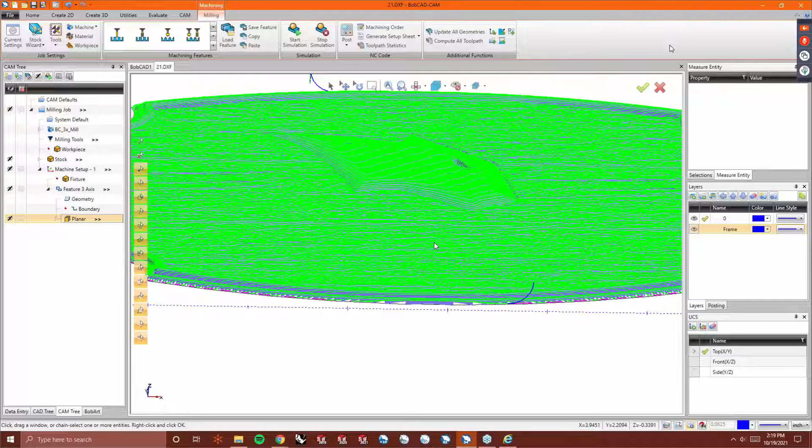Okay, so I need to figure out what the depth was that it took to get to that surface. So what I normally do is I use this bottom of job. So I've gone down -1/4, I know where that is. I'm going to make it 125. If I start to see that it doesn't even reach this floor, then I know that I'm in the right area with the size. So an 1/8 inch looks about right. It's not going any deeper right now. So that's telling me that this surface here is about 1/8 inch from the top of the stock, roughly.

I don't have a good way to measure that. It's not a solid. I can also see the cat head is kind of underneath it. So I want to raise that up a little bit. So let's go back over to BobART. We want to go to the add.

I'm just going to make the base height 100 thousandths because I believe that's what our texture was embossed to. Doesn't mean it's not over that, but that added a lot more than I wanted. Let's go back in there. We'll make it 30 thou, just until we get it nicely met up with the surface, which I think just about did it.

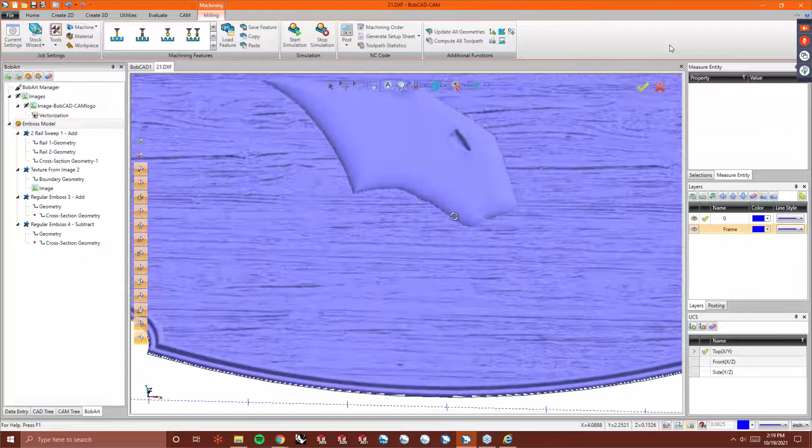If you have geometry that overlaps, if I did a boundary that overlapped this thing, we could do merge high and merge low. Again, I don't use those too often. Really, it's just emboss, regular add or subtract, 99% of the time.

So we're sitting at about 1/8 of an inch down from the top of the material. Let's go to machine setup 1. We're going to add in a V-carve, and I'm just going to pick all of the text. Now I'm not going to worry about the depth, we're just going to have this do the V-carve and cut it to whatever size it gets. The one thing I do need to do, getting a little ahead of myself, is change the top of feature. I need to make that -125. That way it knows the new height.

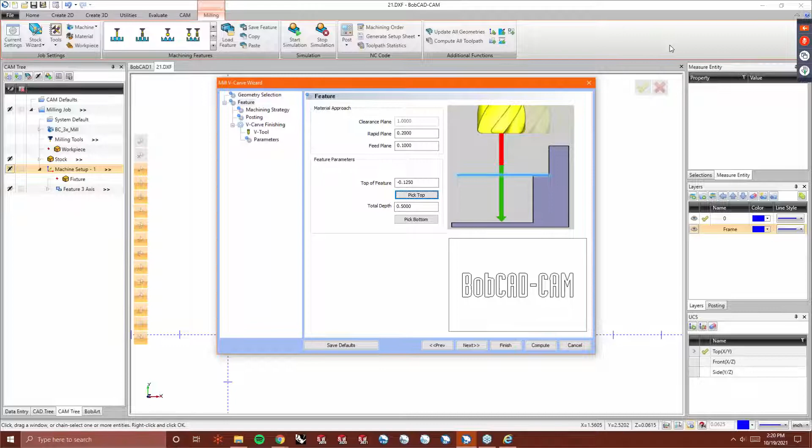So we're doing V-carve finishing. I'll just keep the 1/2 inch 90 degree, and I don't really need to do anything here. Depth of cut, 1/8 of an inch, that should be fine. It's going to do whatever it's going to get to that V on all those geometries. So we'll just hit compute.

Looks like it calculated pretty well. One way to tell if we're inside of the material is turn the emboss on. It looks like it's doing a great job, and if I look at the bottom, it's tracing those lines pretty much right up to the texture. So I'm at a good spot with that 1/8 inch.

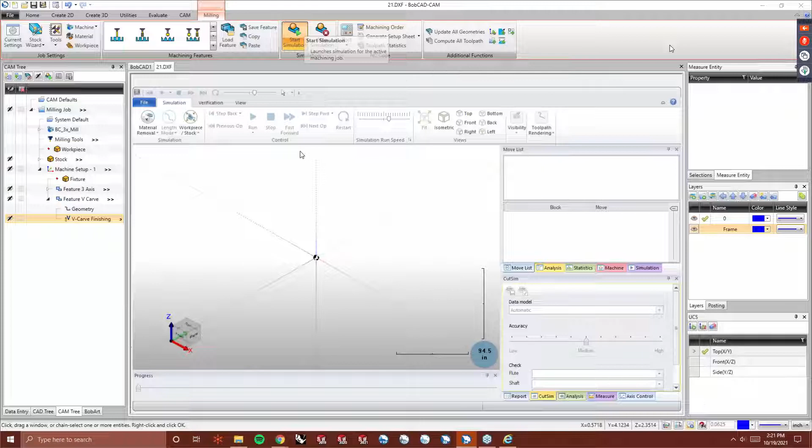Now, I went a little smaller with the end mill, so we should get more of the wood grain texture out of this. I might need to do a tighter step over though. We'll see what it looks like in the end.

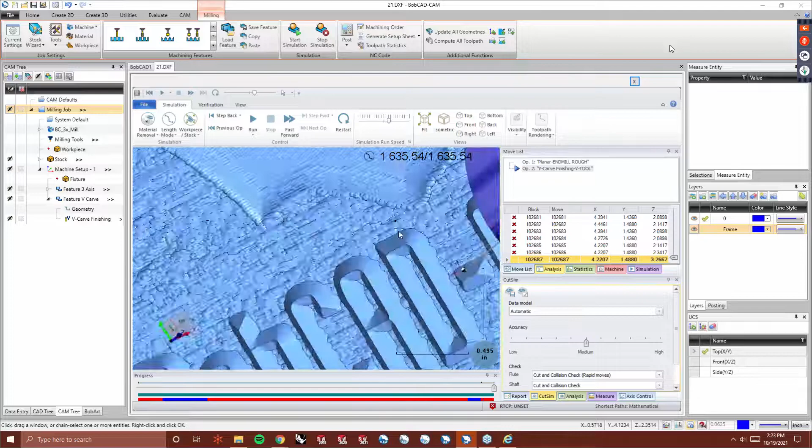Yeah, that came out pretty decent. It really wasn't, it could be a little tighter on the step over, but it's not too bad. But I'm using the V-carve along with everything else to make all that happen.

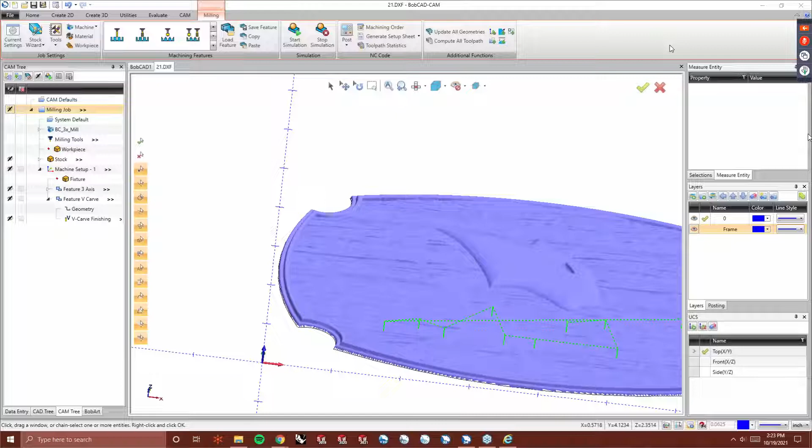Alright, I am back. What you're seeing, Gordon, in the simulation is it is cutting down for those lettering. I know sometimes it can be an optical illusion to make it look like they're raised because of the angle, because of the V-carve itself. But yeah, they're definitely cutting out of the material.